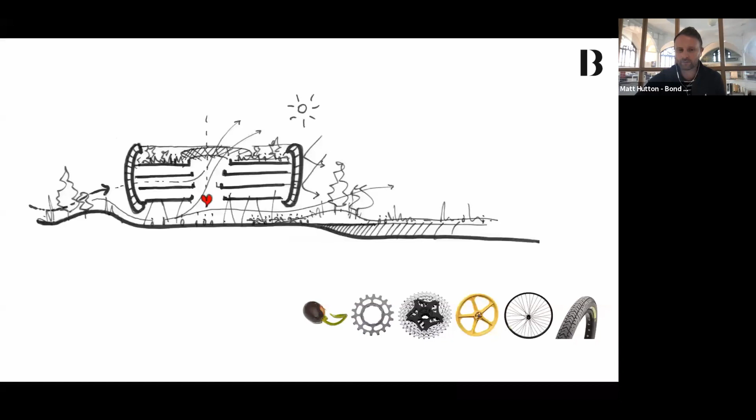As Tomasz just mentioned, we believe passionately that the concept design phase and that early strategic phase is incredibly important to setting the project on in the right way. So feeding that design stage, strategic information into that early concept stage, where we really advocate sketches, model making, and not getting straight into the BIM model and working on a computer directly. We do have the skills and the teams to do that sort of stuff.

So taking a sketch design like we did here to the competition winning design of the Ingenuity Centre at the University of Nottingham. Then we also have the team to then go on and deliver that on site. So we're pretty proud of the work that we do and our process that gets us there.

And we've been very lucky over the last few years to win a number of RIBA awards and other awards for off-site manufacturing, things like that in the sector. So it's been a really nice process over the last 15, 20 years to see Bond Bryan develop as we have.

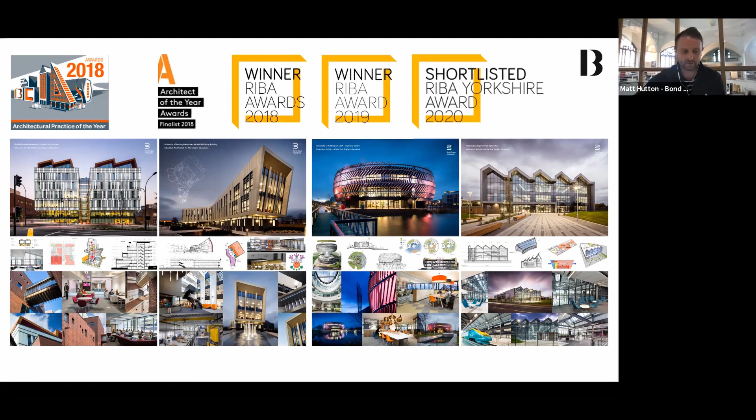So I guess what I wanted to talk a little bit about is our purpose and our strategy, and what we call more than design. So what we actually do. We see our role as architects as being one of assisting and enabling transformation and change. We want every project to be more successful than the last and more sustainable than the last, in whatever way that success is measured - whether socially, environmentally, or economically. We're all about improving the world for a better result.

We take every new project as an opportunity to build upon what we've done before, so we constantly change things for the better, based on evidence, insight, and inspiration. We consider this our more than design process. So what we do is obviously we design beautiful buildings and spaces, however what we really do is much more than that.

We have a digital team under the umbrella banner of Bond Bryan that do a lot of our data management - for contractors, consultants, and architects, because it's becoming increasingly more important. We can help define and deliver your data, perform information manager roles, and advocate and support an open BIM process. We also have landscape in-house now, fully integrated into our design process, which allows us to respond very quickly and efficiently to our clients' needs.

The Bond Bryan Living section, which Tomasz is heading up, are our residential design and delivery team, and they work in tandem with our strategic development team, headed up by Tomasz in Birmingham. That's about finding and facilitating land-led opportunities.

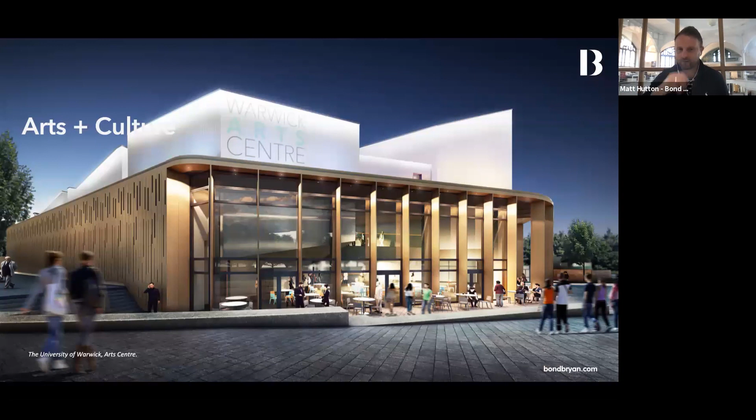We did a large advanced manufacturing building for Magna near Coventry, and more recently we've just completed the degree apprenticeship centre for the University of Warwick. Sticking with Warwick, we have on site at the moment their art centre, a large arts and cultural centre, new build and complex refurb, similar to some of the issues we dealt with at Heartspace. Finally, we're just working on the Centre for Advanced Timber Technology, which ticks a lot of the boxes in terms of what we're aiming for - carbon reduction targets and MMC, big ticket items we've been pushing on as a practice for some time.

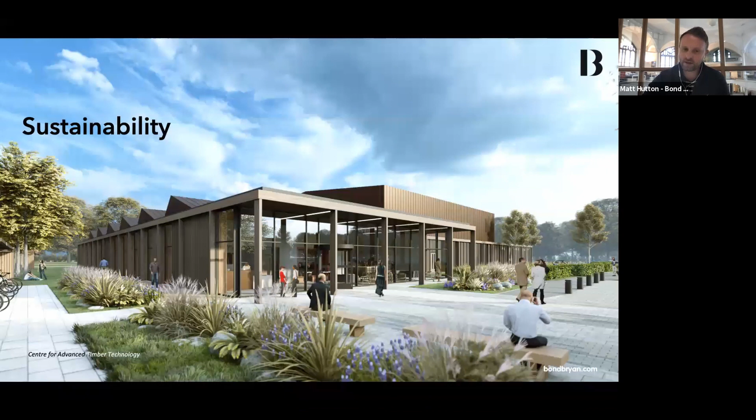So I'm going to let Tomasz speak a little bit more now about Birmingham and what we're doing in the region. Thanks, Matt. I guess the starting premise is, why are we in Birmingham? We're mindful that architects come to this city for all different kinds of reasons. And it's important to stress, as Matt touched upon, we've actually been in the city now for around 5 years already, in addition to undertaking work within the wider region for many years prior to that. But with myself relocating here in January, and where we are as a practice and the next chapter of the city, the time is definitely right to lift our presence within the city and be part of that wider conversation.

So if we go to the next slide, please, Matt. A big part of our methodology is looking beyond buildings. Cities create synergy. They're a focus for creativity, ideas, commerce, and culture. We're really interested in this at Bond Bryan, and we understand that the buildings, spaces, and places that we create as architects are reflective of this energy of what goes on in a city at a particular point in time.

And the images picked here very much underpin this narrative in the context of European cities, where historically there have been some really important transitions and shifts in specific locations that have massively influenced where we are now. You can add others to this, but we picked ancient Athens, Renaissance Florence, 18th century Paris, Industrial Revolution Manchester, and the fall of the wall in late 20th century Berlin.

So what happened in these cities was a huge influx of what the French call émigrés - an importation of ideas, cultures, people, change, underpinned by a strong existing local presence and condition. We firmly believe what is going to happen in this city over the next decade, Birmingham will fit into one of these moments. It's as simple as that. And we want to make a really unique contribution to that conversation. If we can go on to the next slide.

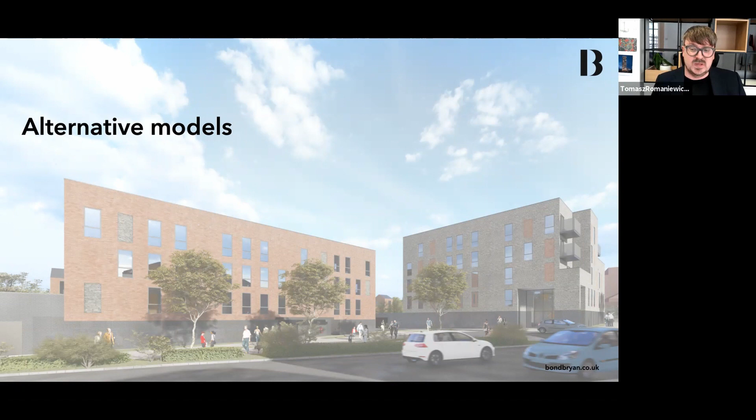We can move on to the next slide please, Matt. One of my specialisms is build to rent. I've been involved in the sector since its inception into the UK market a number of years ago, and its potential is massive as a tool for regeneration. It will play a key role within the city over the coming years, and it's been really interesting for me to experience the sector both as developer, architect, and now finally a resident at the Whitmore.

This is the Meridian scheme up in Sheffield, where we've just lodged an application for 336 units with Birmingham-based developer Godwin Developments. And on to the next slide, please, Matt.

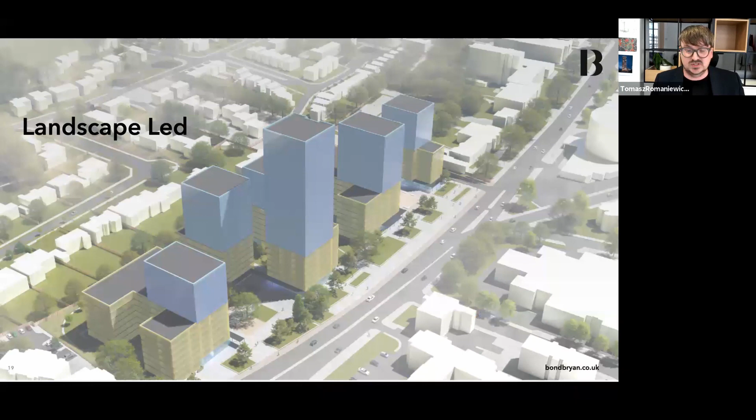We are picking up projects in Birmingham. This is the Hagley Road Master Plan for Calthorpe Estates. And as Matt touched upon, one of our USPs is we're a landscape architect as well. Landscape projects are so landscape led these days. We believe it's invaluable to have our urban designers, architects, and landscapes all working holistically as one team from the outset. Then on to the next slide, please, Matt.

Finally, we're massive fans of densification in sustainable locations. I don't just mean building densification, but densification of landscape, well-being, amenity. This is one of two projects we're doing with Berkeley Homes down in London, which epitomizes that narrative - the Overstation Development East project, which we're currently on site with, essentially building over Woolwich Station.

So that's it from me. I'm going to hand the floor back to Matt, and I look forward to engaging with any questions at the end of the session. Thank you.

Thank you, Tomasz. I hope that was a good introduction to where we are and what we're doing in Birmingham. Hopefully there'll be some Q&A at the end specifically about Birmingham, because I guess that's why we're here.

But I thought it was useful to use this opportunity to do a case study on one of our most recently completed projects for the University of Sheffield, the Heartspace project, because it's a good process and project that really explains what we did in terms of smart thinking space, and it delves a bit deeper into how we actually deliver these types of projects. There'll also be a bit of a CPD element, because Yara and Sarah are going to do some technical information towards the end as well. But I'll try and get through this as quickly as I can.

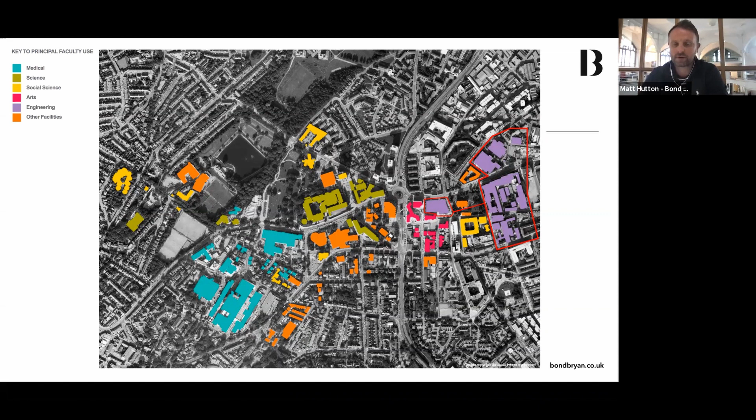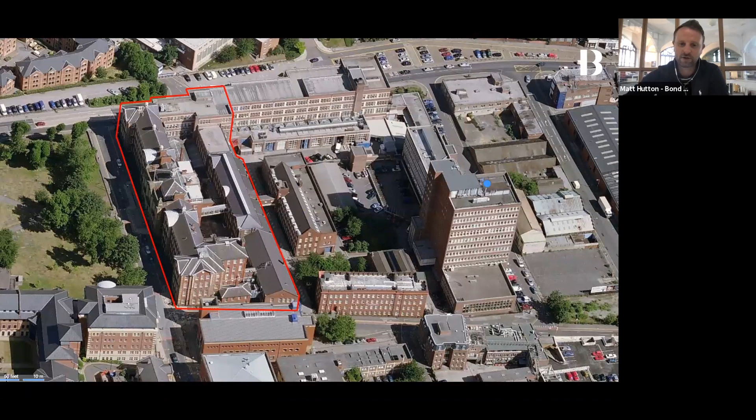The red line boundary is what became our red line boundary for the Heartspace project, but we were actually looking at a piece of strategic work for the whole of the engineering campus. So looking at the top of the image, the three buildings we were directly affecting were...

The Sir Frederick Mappin building, which is from about 1890. It wraps around the corner on the left-hand side to a small 1938 extension and the caretaker's house that came in later. To the right-hand side, there's the Broad Lane building, a late 60s, 70s add-on. And the central wing at the base of the image is the oldest building there.

We were actually trying to create something that knitted all of these buildings together, and you can imagine all the different level changes and issues we were going to have to deal with there.

Internally, some of the spaces in the buildings are absolutely beautiful - the hall, the library space, some of the existing features that we retained. But overwhelmingly, the building was in a poor state of disrepair, to be quite frank.

So when we began our very first look at this, we were just trying to figure out which elements we could retain, which needed to be demolished. That's all part of our early smart thinking spaces vision workshops. So there's some images of the site, and crucially, the courtyard space, which is the space the university wanted to convert into usable accommodation.

Our strategic team came in, headed up by Steve Maslin, and worked with the university to develop a brief, which was about them becoming the best engineering faculty in the UK. They're one of the top 3 in the world in terms of engineering faculty, so perversely, they were working out of some of the worst quality accommodation on the campus. And that was something we were going to address.

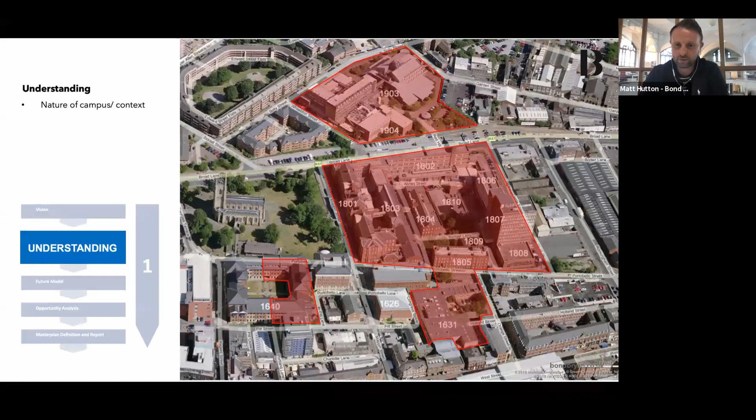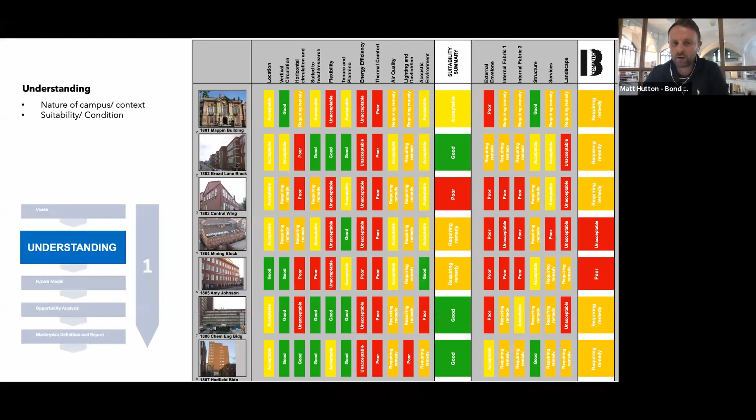As part of our process, we go in to really understand the detail of the campus. We went around all the existing buildings to understand the nature of the campus, and did a condition survey looking at which bits we should retain, which we should demolish or remove, or where there were opportunities for new builds.

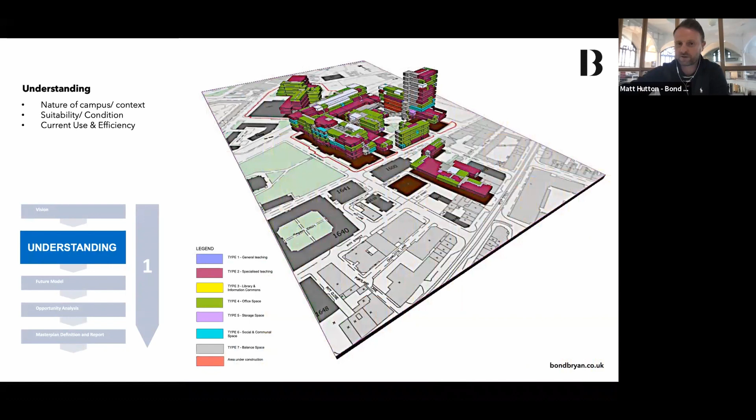We then even go right down to room by room level, looking at what each space is being used for, but also the utilization of space to see if there's any efficiencies we can drive through the process.

That process helps us identify where the gaps are between what the university have at the moment and what they want to achieve with the new building. We use that future model and gap analysis targets as part of our circular thinking methodology, where at each RIBA stage we make sure we're heading in the right direction and aiming towards their KPI. Once we've done that, we did a series of opportunity tests where we had infill projects or projects that may sit within the campus.

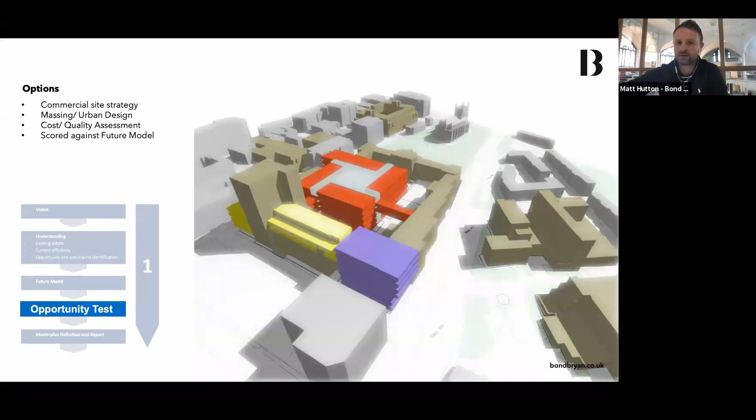These projects get scored against the future model we'd created. Effectively at the end of that process - this was back in 2011, I think, it was a long time ago - we identified, the red section you can see here are new build projects that were part of a phased master plan. The orange sections were future phases.

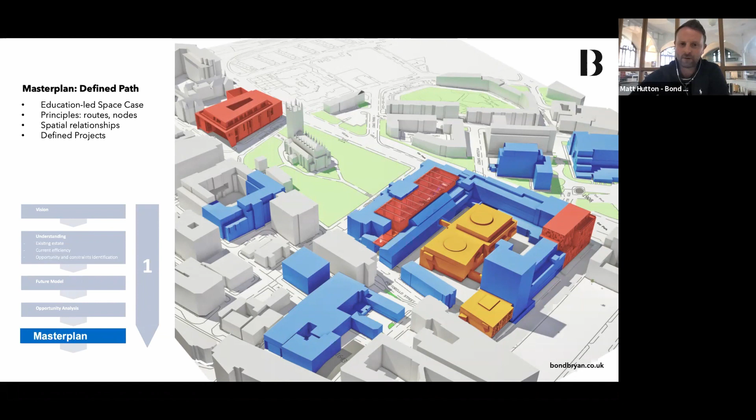Any of you that know projects within the university may know that the one on the far right is what became the Pam Liversidge building, which is one that we built and designed. That was an infill project in the corner that dealt with lots of transitional space, created a new small mini atrium space. But it's really about dealing with the level transitions that existed within the existing building.

The one at the top left-hand side of the page is what became the Diamond building, which was designed and delivered by Twelve Architects. And then the one in the middle is what became the Heartspace project. That was identified back in 2010 as part of our strategic work for the Development Master Plan.

Key part of our work, and Thomas mentioned it earlier, is even before you put pen to paper, this is about us trying to understand our clients' requirements and drive efficiency into what they need. We managed to accommodate 108% growth in their student numbers, staff numbers, and space requirements, but only a 60% GIFA increase by the work that we've done.

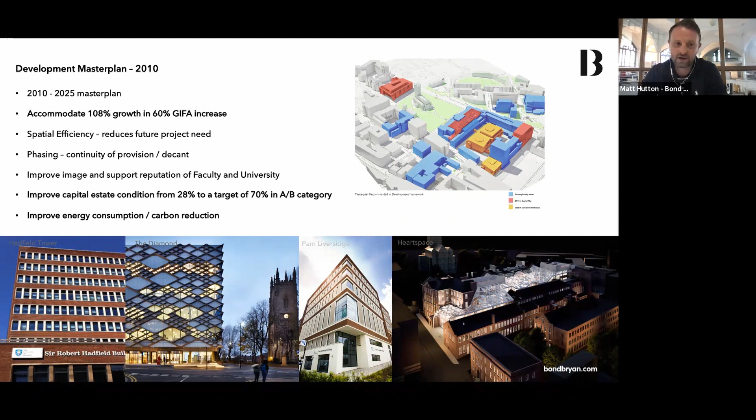Again, it was improving the capital estate condition from 28%, which was really low, up to 70% in the A and B category, which is now done. And there was a big drive towards energy consumption and carbon reduction.

So once we set the development framework in place, the university then did a design competition that we went for, and I led that process. So these are images back from 2012.

The new NEB, which is New Engineering Building, on the left-hand side, is what became the Diamond. There was always a thought process that they were going to move all the students out to the NEB, and the staff and postgraduate students would be located in the Heartspace.

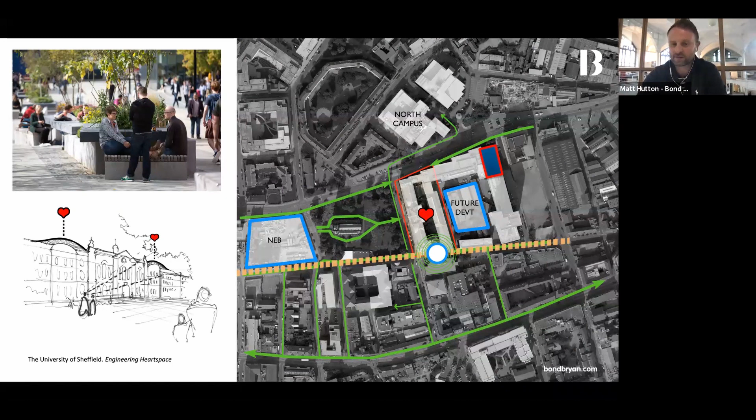The gold line you can see across the bottom, the dotted line, was a future phase of a pedestrian master plan within the city centre called the Gold Route, right away from the train station up towards the university. So as part of our analysis, we were thinking we should be making a statement on that Gold Route, because we knew we were going to be demolishing some of the older buildings behind in the courtyard, which was already going to be problematic.

There's a lot of the gubbins that make the buildings work—substation, deliveries, everything was in that centrepiece. But we wanted to create an entrance through there.

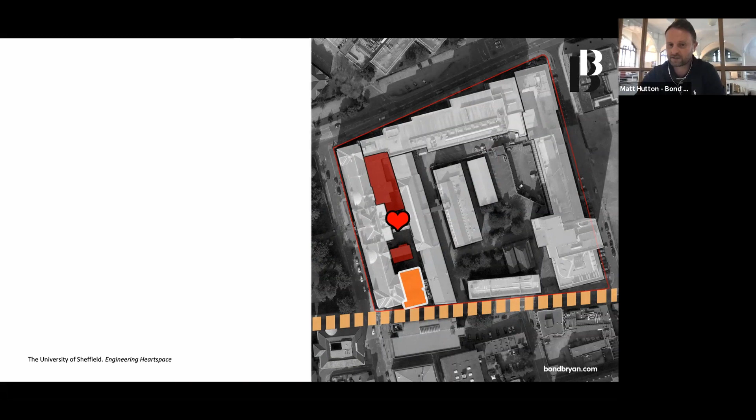So we looked initially at the 1938 extension and the caretaker's house as an opportunity to demolish and bring a brand new entrance in off the Gold Route. We did that by looking critically at things like heritage impact assessment, working with our heritage and planning consultants at the design competition stage to see whether this would even be possible.

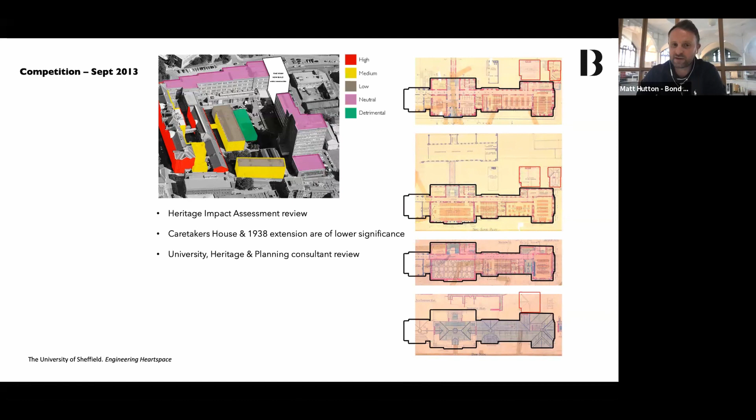So again, all back in 2013. And also part of the drive for that was—this is an image looking on Portobello Street. The left-hand side is Mappin Building. You're looking at the old caretaker's house and the 1938 wing extension.

Even if they were retained to build the building, you had a very limited access—you're talking probably less than 6 meters to get all the building materials in through that space. So not only did we want to do that for the sake of creating a new entrance, but it was going to improve the access. It makes it much easier to construct, and then it improves that pedestrian experience.

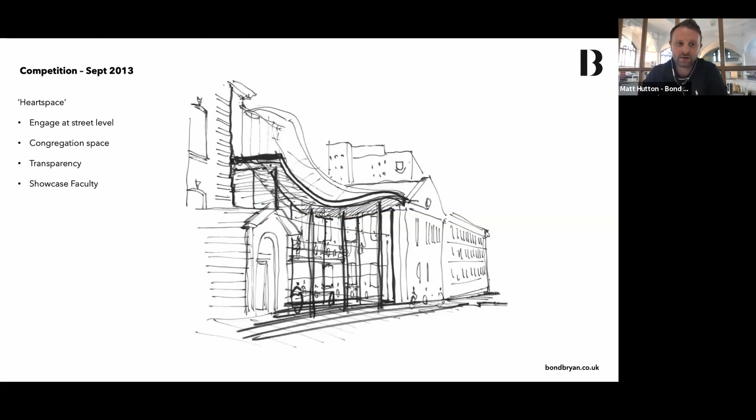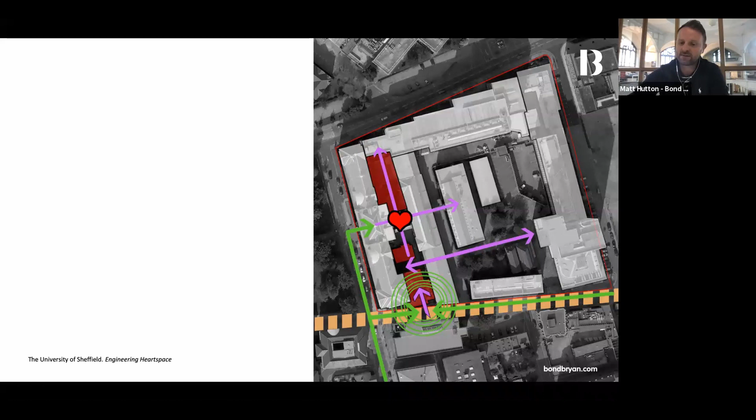So in our first initial sketches, what we're trying to do was create something that really engaged with people at the street level, so you could see into this new Heartspace, see the big investment the university have made—lots of transparency, a bit of congregation space, really showcasing the faculty internally. And then thinking about, once you brought them in, how do you then connect through to the existing buildings that were there, and also the future phases beyond that.

The Heartspace concept really was born out of an idea that the building itself is a mixture of heavy labs for mechanical and electrical engineers and lots of cellular office spaces for them as well. What we're trying to do with the Heartspace is tempt the engineers out of the laboratories, out of their individual office spaces, to come and sit together, socialize, communicate, bounce ideas off each other—have those kind of peer-to-peer conversations that they weren't having as cross-faculty discussions.

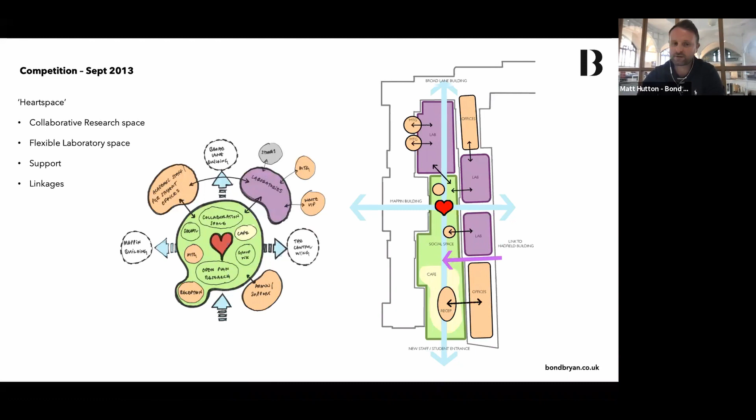The concept really then was: we've got to retain the existing buildings. We know we can't put too much weight on those existing buildings, so we need to drop a roof in there that's going to be quite lightweight, that's going to really celebrate the engineering faculty, the new and the old section. We conceived it as an independent structure that would respect the historical significance of the Mappin building and the central wing, but then we'd need to insert some contemporary additions, which we thought exposed concrete was the simplest way of doing. This could then showcase featured laboratories and spaces within that, and a new cafe social Heartspace at the ground floor as you come in.

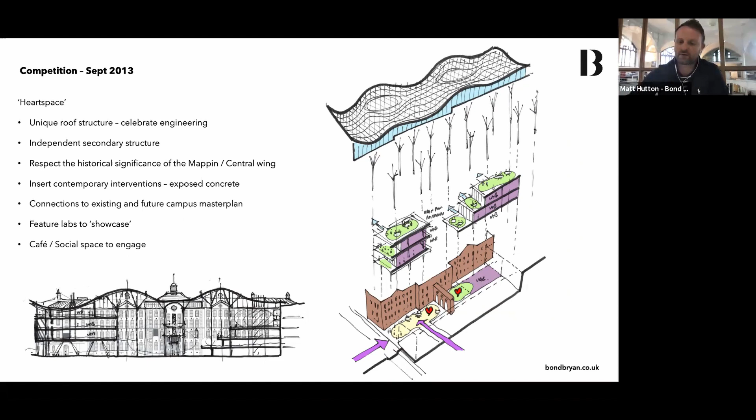So these were the images we produced for the competition way back in 2013 that got us the gig, thankfully. And hopefully you'll see towards the end, it's not too far away from where we were at that stage, but you can see the new insertion there.

At that stage, we were planning to demolish all of the buildings towards the Portobello end of the street, knowing that effectively once we got into the planning conversation, that would be unlikely, but it was about creating that kind of impact and that concept.

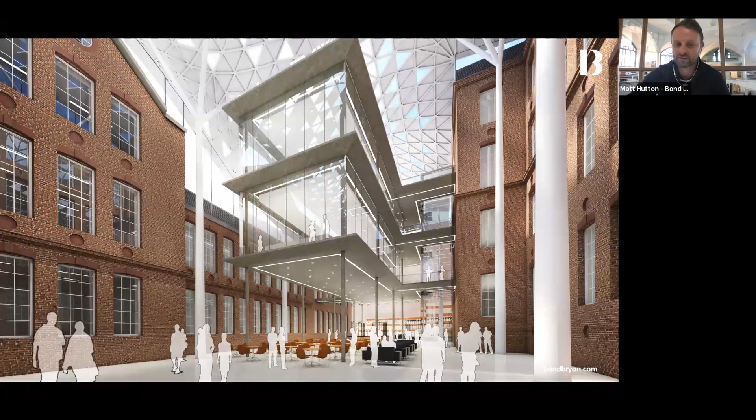So once we got through the competition phase, it was then a case of thinking, crikey, how do we actually deliver this now? Because it was a great concept and idea, but an incredibly difficult process.

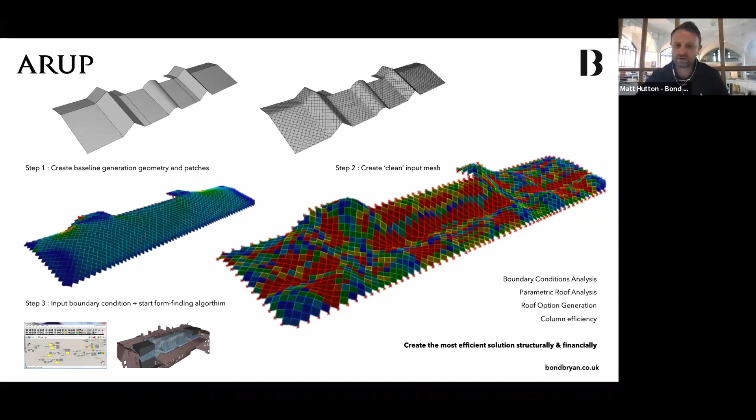So we were working with Arups. We spent a lot of time down in their London office working with their modelers to define the boundary edges of where this roof was going to work. Not just testing visually what it looks like, but physically, can you actually make it stand up? How does it affect the glass, the thermal properties?

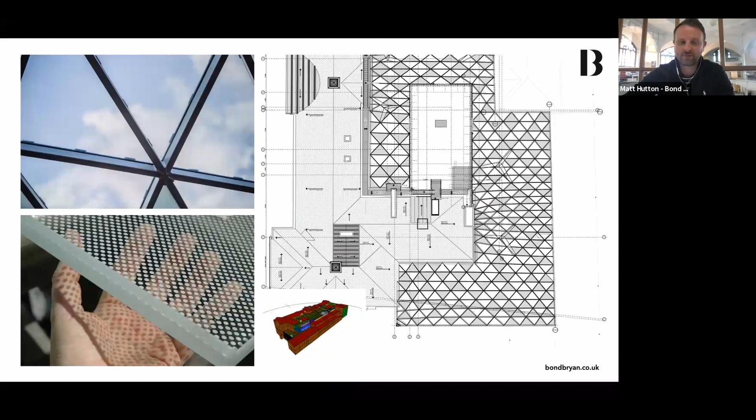I learned a hell of a lot about G values and various levels of specification on the glazing, which I hadn't learned before. So we spent months designing the roof with a specialist company called Waagner-Biro, who were a great company to work with.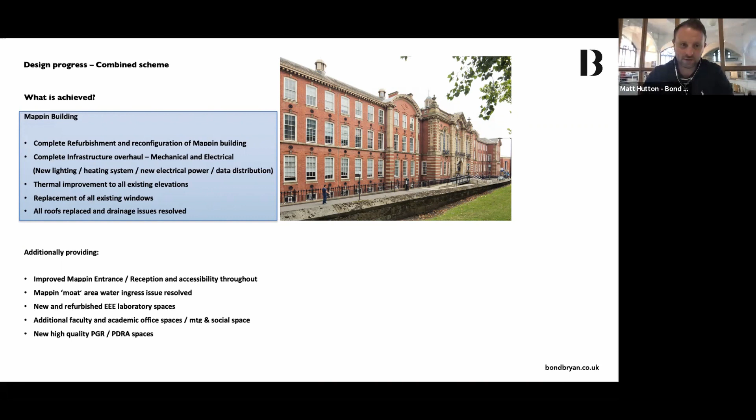So once all that process had been done, we submitted the planning application, and this just tries to explain that beyond the heart space, which is a fantastic visual image of what we're doing, a lot of the work, money and time was spent in the existing building. So we did a complete refurbishment and overhaul of both the Mappin building and the central wing, a complete infrastructure overhaul - lighting, heating, everything. That was for both of the larger existing buildings.

And then in the middle, we were about creating new high quality laboratory spaces for the mechanical and electrical engineers, resolving all the accessibility issues between the two buildings, and creating the big new open plan heart space.

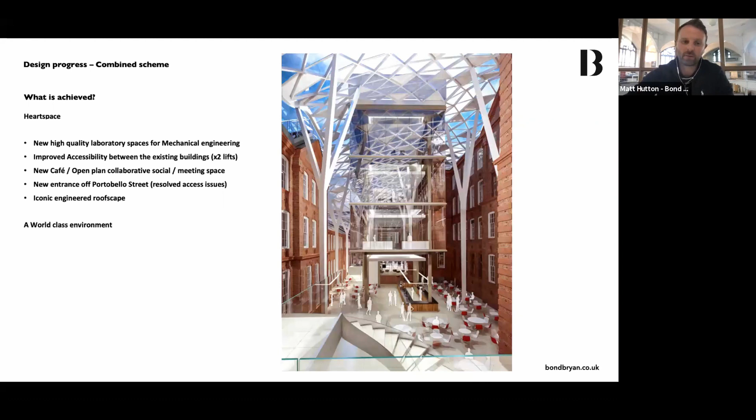So moving on to construction. We couldn't have done this process without fully integrating our BIM processes and how we work as a business. Remember, this was back in 2014 - BIM level 2 was just in its infancy, but as a business we'd already been working in 3 dimensions and using BIM with ArchiCAD for about 15 years at this stage. So we were well ahead of the curve, and still are.

So our open BIM processes, which we still promote now, allowed us to work with multiple consultants across multiple different disciplines and various different products as well - things like Rhinoceros and Grasshopper, which they were using to develop the roof with, Tekla, Revit, ArchiCAD - we can use and collaborate with anyone.

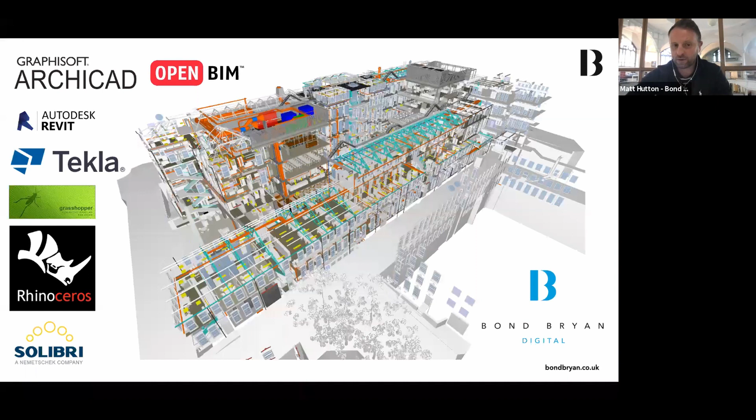But this was a really big and important step for us. It wasn't something the university wanted us to do specifically, but we wanted to, as a practice, test how we could make this work on such a large and complex building.

And this was just to show you some of the things beyond the typical M&E junctions. What we did is we actually modeled all of our details one-to-one in 3 dimensions, because it was a listed building, and because the junctions were so complex and difficult to understand. This is just the level of detail that we went to.

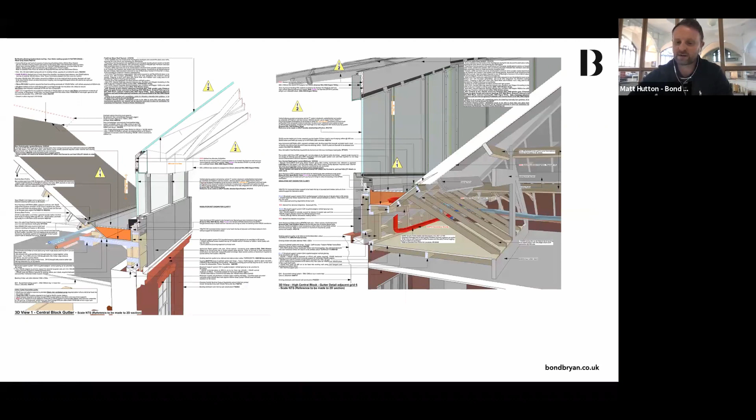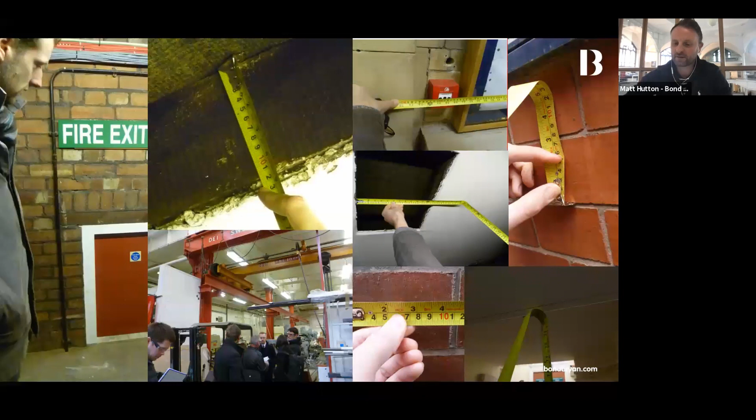And I always say, put this in, because it's great modeling everything in 3D and having all these BIM models, but nothing is better than going down onto site and actually physically seeing these things, how they're put together, measuring them. So we've had reams of photographs of site visits to make sure that we were hitting all the right notes in terms of where these new bits were going to go into the existing building.

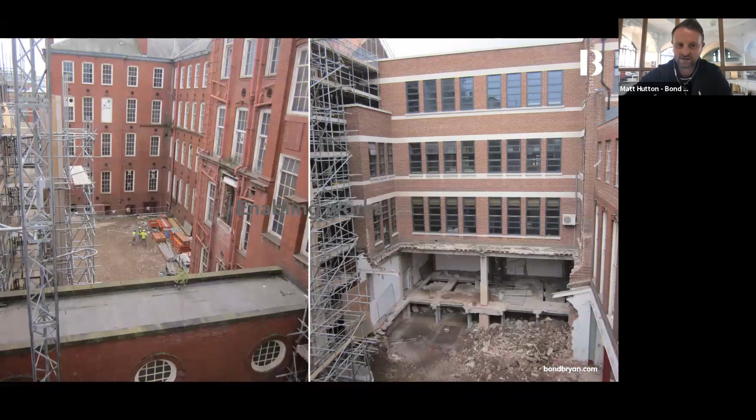So once we started the enabling works process, you can see those existing buildings that were much later additions, sort of 70s, 80s, have now been removed. We're starting to dig out some of the spaces for the basement and how we're going to then slide in some of the new atrium floor spaces here.

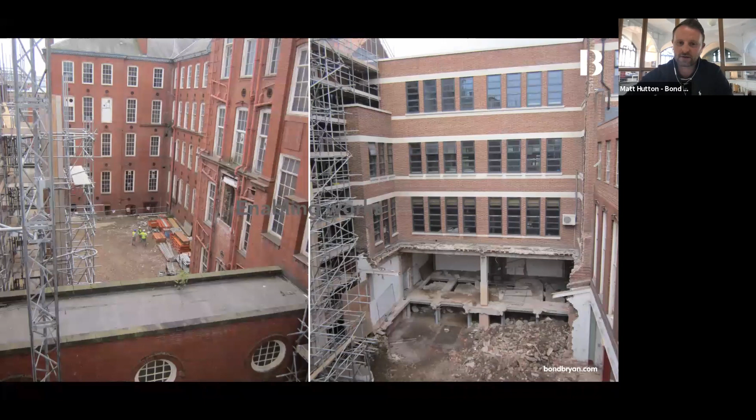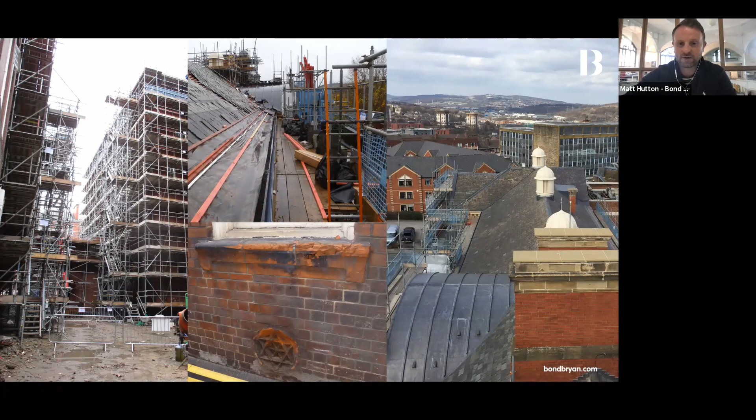Here's some images of the roof of the existing buildings and the state of some of the window sills - the windows themselves were all completely rotten. So this is a huge part of the process, a huge part of the program on site, and cannot be underestimated the amount of time and effort we spent on that, removing every single slate individually and replacing it back once we'd re-roofed and re-insulated. We had a specialist consultant on board just to look at all the heritage issues. They did a fantastic job in terms of re-leading the roofs and things like that.

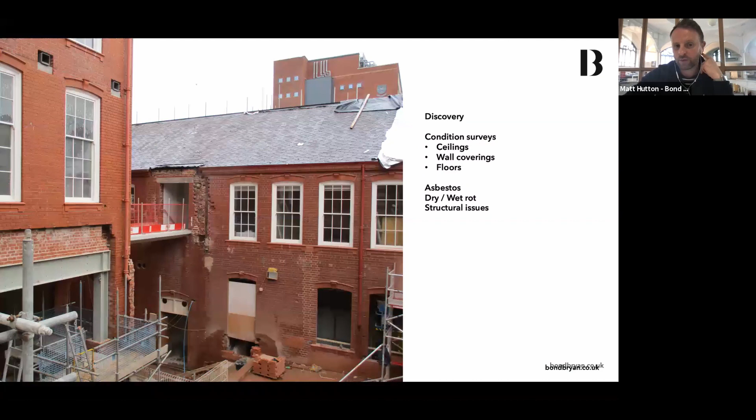So really, really involved - part of working on a listed building like this with a contractor, and made more difficult by the fact that we did it through a single stage design and build process, was the discovery of things as you start to uncover and open up the existing buildings.

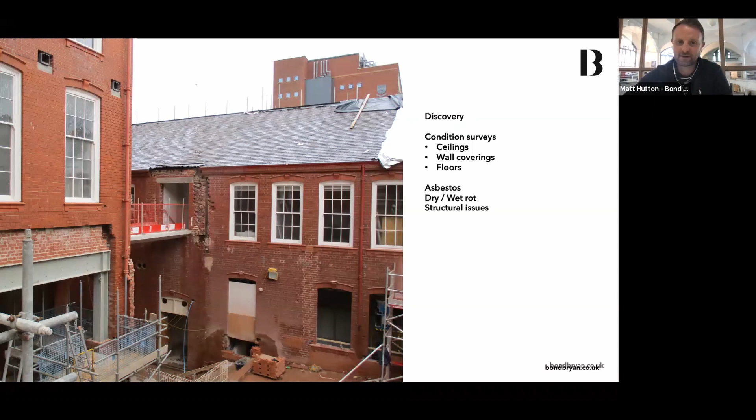So whether that's the ceilings, issues we had, wall coverings falling off, the floors, which Yara and the team will talk about in a moment, we found everything: asbestos, dry and wet rot. There's nothing we didn't find on this project over the 10-year lifecycle. The images I showed you earlier of the existing buildings and the nicer spaces, I wanted to contrast that with some of the existing spaces we found.

So these are just some of the internal spaces throughout the building. There were multiple level changes, mezzanines inserted in, and unnecessary level changes as well that were not required, that we had to remove.

We must have had 50, 60 different door types to look at. In terms of historic impact, there were lots of those we needed to retain as part of the conservation team's requirement. But imagine the size of the door schedule in our BIM model—it was enormous.

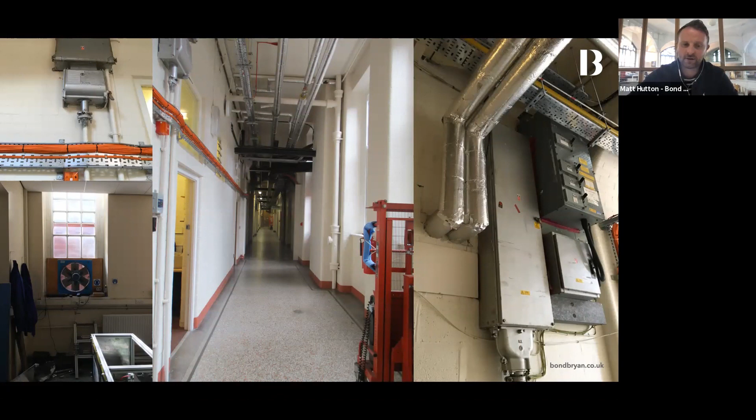In terms of the existing M&E, it had all been done piecemeal over time, over many, many years. So it was a real hodgepodge and a bit of a mess that we then had to really try and understand how we were going to rejig the M&E design.

Just before I hand over to Yara and Sarah, let me show you the flooring issues we had, and hence why we got Altro involved and why I got Yara on site immediately—we must have had 20, 30 different floor substrates we had to deal with. But I'm pretty sure Yara will be able to explain that a bit better than I will. So I'll hand it over to Yara.

Thanks, Matt. Hi everyone, my name's Yara. I work for Altro on the specification side of things. You probably won't come across me, mainly because I tend to work with practices in Manchester and Sheffield. It's Sarah who will be your main contact, so you'll get to know her.

The reason this project was a really huge success for us, one of many we've been lucky enough to work on with Bond Bryan, was down to their collaborative approach. Since the beginning, as Matt mentioned, 2012, they've always shared the visuals with us—everything, we're involved from very, very early on. As a result, we live and breathe the project as it's evolved, which in this particular example really did save the project from our side of things.

So what happened originally, when we saw the visuals from concept stage, a different product was specified. We specified—it was actually my colleague Marco—a traditional bonded flooring system, safety floor. What happened as we went to site, we came across, as Matt said, 20 to 30 different substrates, which is normal when you have an Edwardian building, a Victorian building, linking to a new space. We had to rethink the whole specification. What we had specified was no longer going to work.

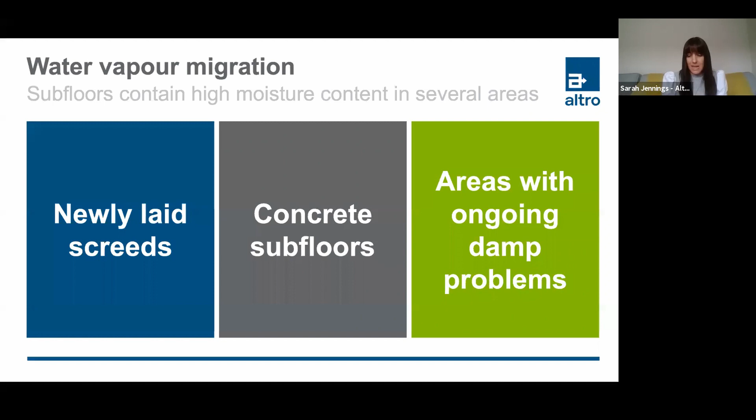Thanks, Yara. So the technology—how does it work? It was actually introduced over 11 years ago now, after years of development, and it's designed to be installed over new screed and concrete substrates, as well as areas with ongoing damp issues, and even existing floor finishes. So moisture vapour within a slab will remain immobile until such time as the floor is covered.

Once covered, the moisture vapour, which cannot escape through the structural DPM, will push for the surface. As it's now covered with a semi-impervious floor covering, there's no path for it to escape, and it's going to sit under the surface and produce water-filled pockets, as well as attacking the adhesive which secures the floor covering. One solution for this could be to look at applying a surface-applied damp proof membrane.

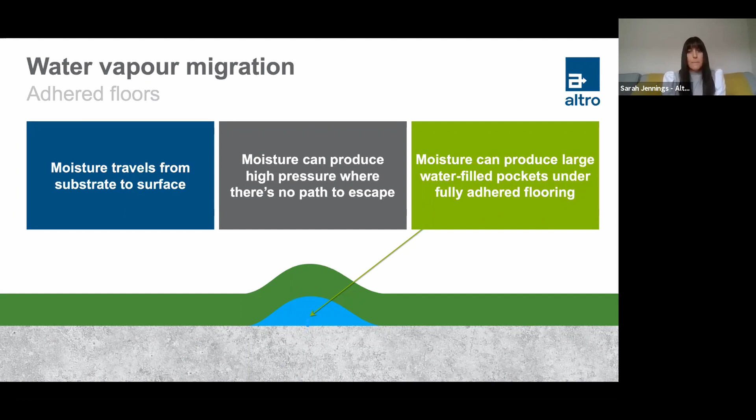That allows for a controlled amount of moisture vapor to filter through, and the level is well within the tolerance of products installed above. But how the adhesive-free technology works is the same.

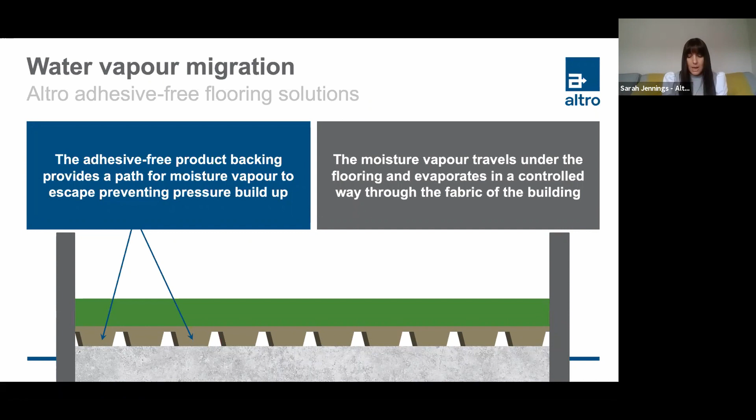It has a specially formulated underside which allows the flooring to sit away from the subfloor, allowing it to breathe. Any moisture remaining in the substrate can dissipate without the need for a surface-applied DPM. This speeds up installation, as there's no need for DPM or adhesives, meaning you can return the floor to service a lot quicker—pretty much as soon as installation is completed.

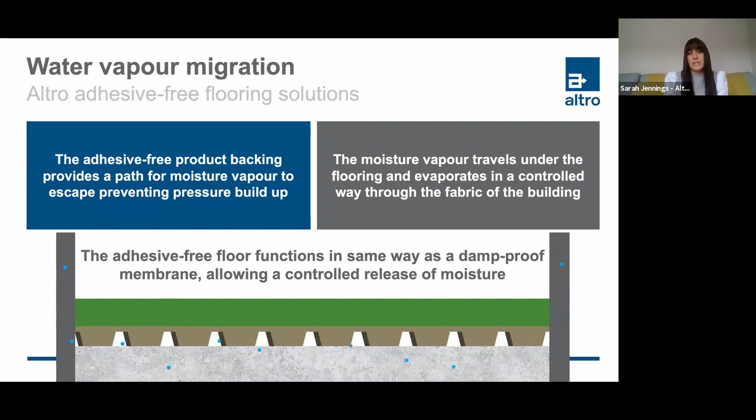We see up to 50% savings on installation times on projects, and in some cases up to 35% on installation costs. There's no compromise on longevity or robustness, as these products have the same lifespans and guarantees as their adhered counterparts.

Adhesive-free technology excels in environmental credentials, with 10% recycled content, and it's 100% recyclable at end of life, as there's no adhesive or leveling compound when ripping the floor up—meaning relaying the next floor is massively easier and quicker. It's great when we look at circular economies.

One amazing high-profile job we were involved in was the London 2012 Athletes Village dining area, where 20,000 square metres of the adhesive-free product was installed for this temporary installation.

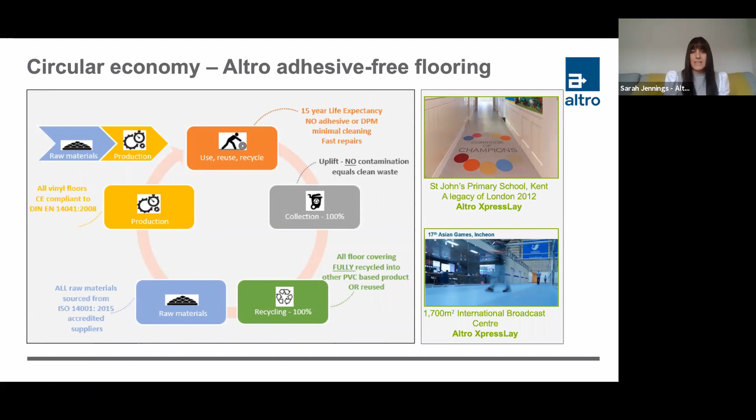After the games, the flooring was uplifted and redistributed to local schools, as you can see on the top right of the screen. The rest came back to our manufacturing facility in Letchworth, where we have the world's only safety floor recycling machine, part of the Recofloor scheme you see here.

The vinyl gets broken down into chips and either put back into the manufacturing process or sent off to be recycled by others. This isn't just safety floor, it can be smooth vinyl as well. It's been going since 2009.

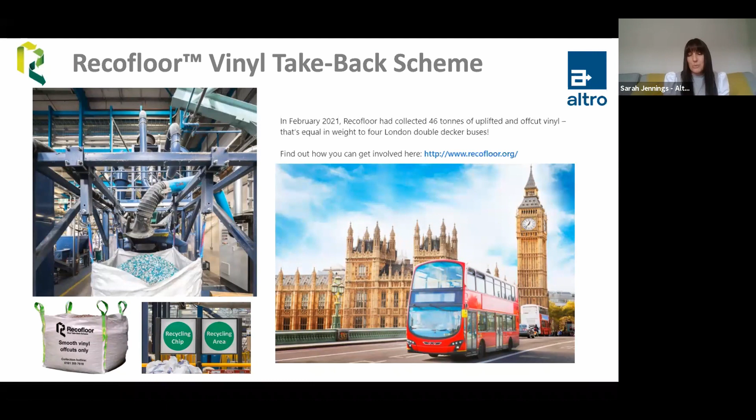On average it recycles 1.3 tonnes a day, but we recycled a whopping 46 tonnes in February this year, equivalent to 4 London double-decker buses.

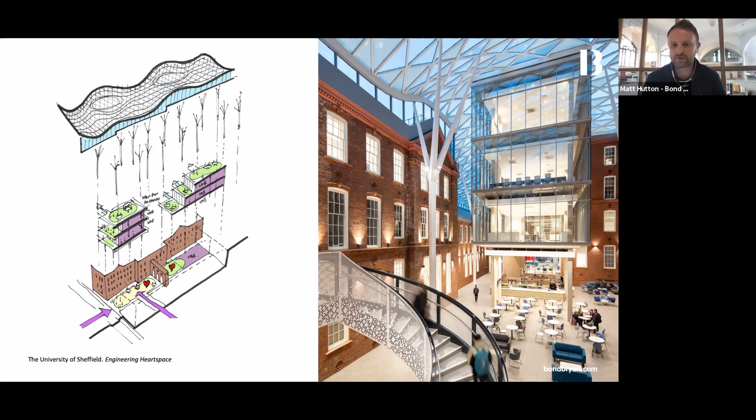You can see here the new accommodation, the new cafe space at ground floor, and the new helical stair that takes you up to the main entrance. This is what became the main entrance—a sort of 3-storey glazed entrance here.

You can see at the bottom of the screen, we actually managed to drive a huge hole through that existing building to create visual connectivity between the street and the new accommodation behind.

Here's another image of the outside of the building, looking at the stepped floor plates as you go up through the building. We tried to create as much open collaborative space as we could by stepping the floor plates up through the heart space. It also gives you a really unique perspective of the existing building and its engineering details from all the different levels.

Here's the students - that's not posed, they were just full. It's really working incredibly well. It's exactly what we wanted to happen, and it's driving a lot more footfall and student and staff collaboration within the heart space.

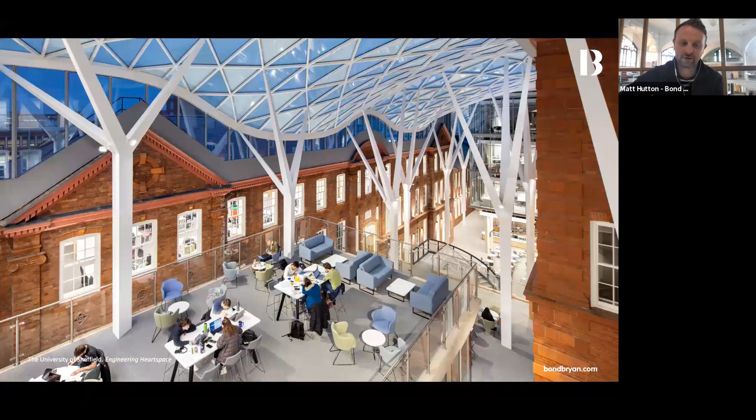We've been lucky enough to win a few awards for this already. We're shortlisted this year for the RIBA award, so fingers crossed on that one. Finally, just some last images of the feature staircase with the wet lab underneath it, showcasing all the new laboratories through the glazing at the bottom. Then the new laboratories, IT spaces, and the boardroom, which is at the very top of that block on the right-hand side.

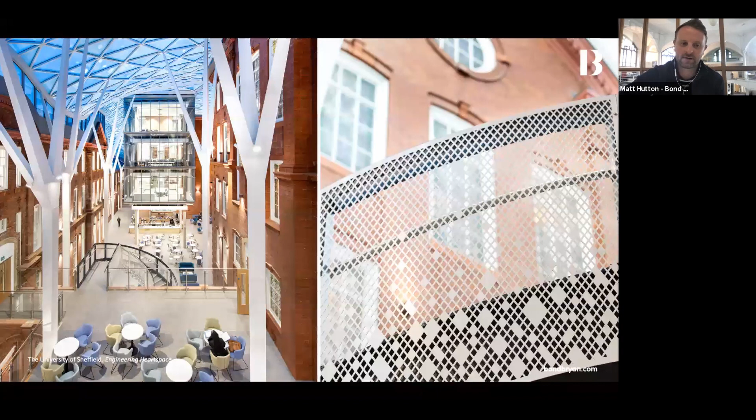There you go, last few slides, almost complete. That's a view looking back towards the main entrance.

None of this could be done... it's nice for Thomas and I to talk about Bond Bryan and just us two being here, but this was a massive effort, even beyond the people on the screen here. Pretty much everyone in the business touched this project at one stage or another over 10 years, but they were the main team. I guess hopefully that's been interesting for you guys.